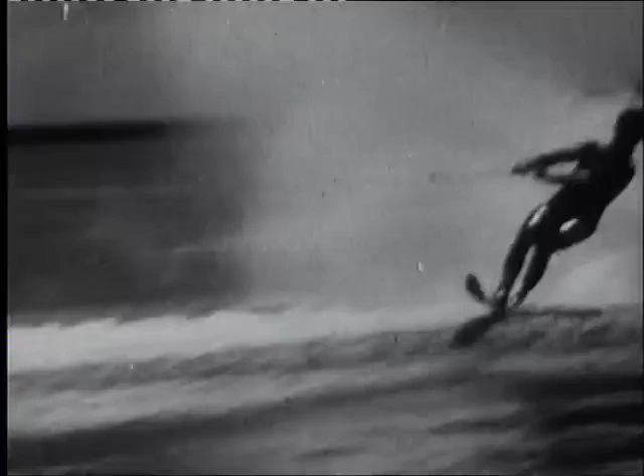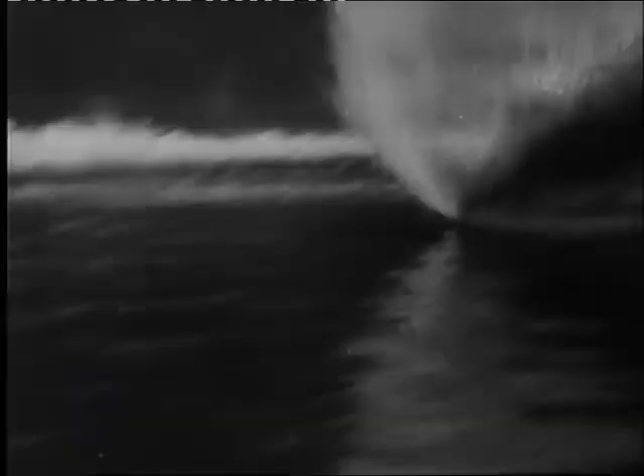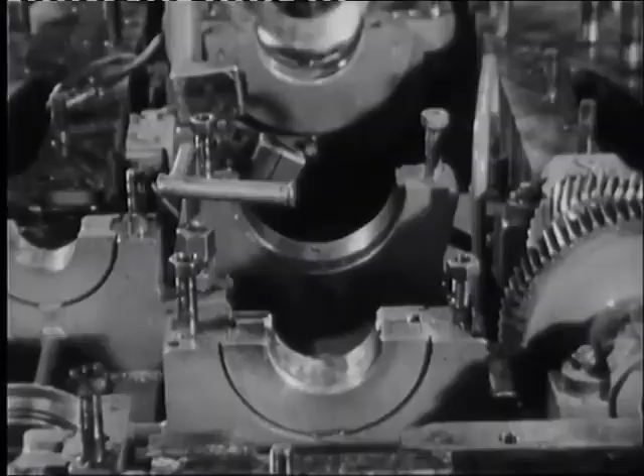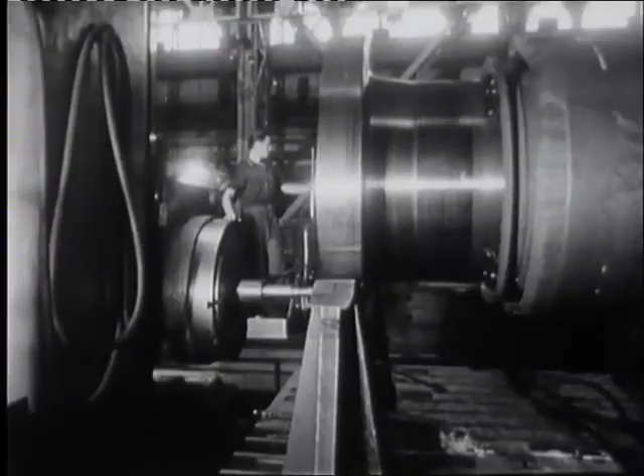In general, in a number of critical areas of technology, plain bearings have predominant application. They are versatile and provide reliable, durable operation of the support units of extra heavy shafts. High accuracy of precision machines.

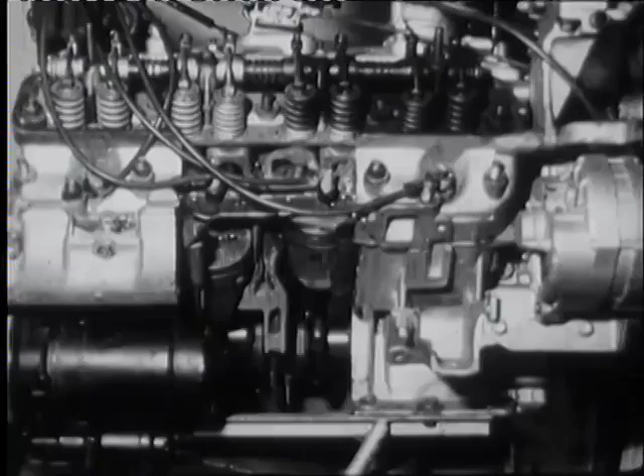The plain bearings operate reliably at high shaft speeds, and in adverse temperature conditions, as well as in a polluted and aggressive environment. They are insensitive to high shock and vibration loads. The performance of plain bearings is due to the simplicity of their design.

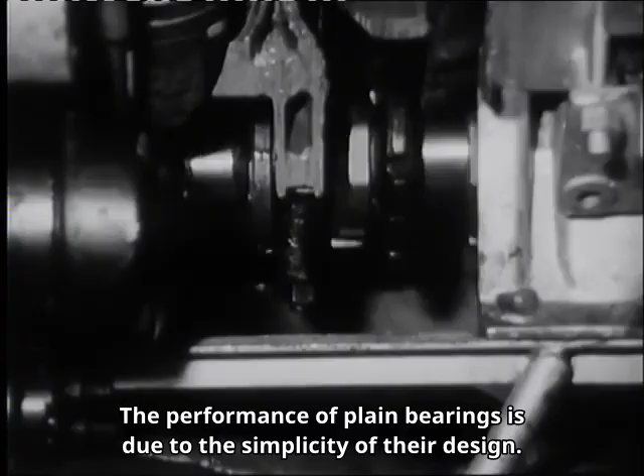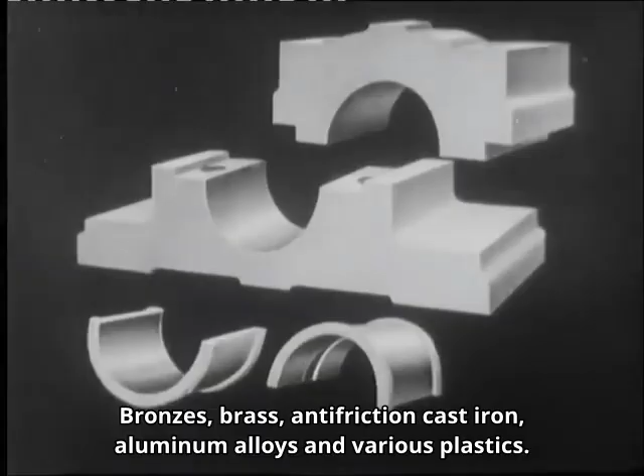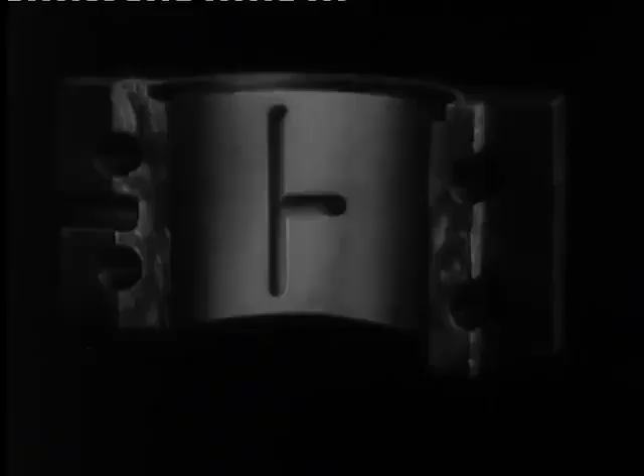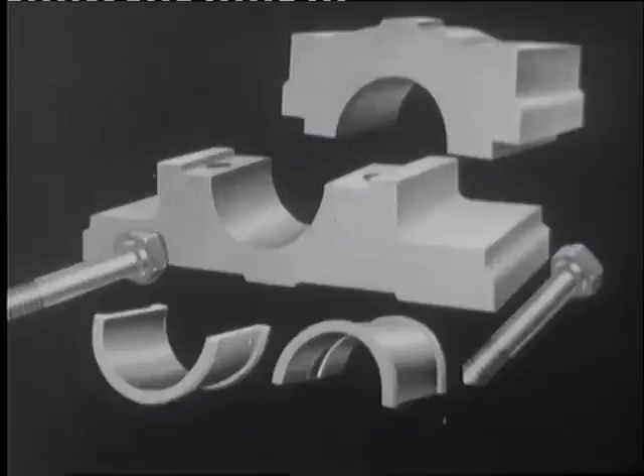Thus, the most common radial plain bearing in technology consists of a steel or cast iron housing and an insert made of anti-friction materials: bronzes, brass, anti-friction cast iron, aluminum alloys, and various plastics. The steel liners have an anti-friction coating made of babbitt. The liner has oil supply holes and lubrication grooves. The sliding bearings are usually detachable, which simplifies the installation of the supporting units of the machines.

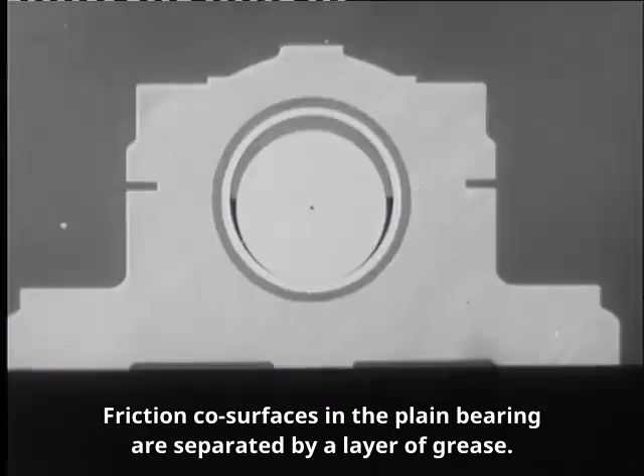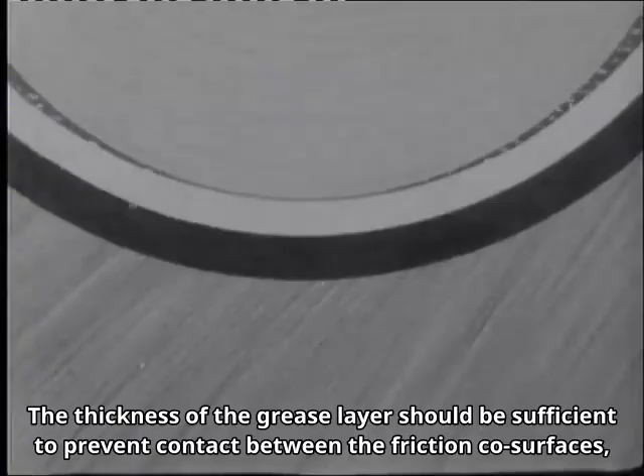Friction co-surfaces in the plain bearing are separated by a layer of grease. The thickness of the grease layer should be sufficient to prevent contact between the friction co-surfaces, which lead to their wear and large losses to overcome friction. In bearings, it is necessary to provide a mode of pure liquid friction, in which there is no contact between the rubbing co-surfaces and friction occurs only between the layers of lubricant separating them.

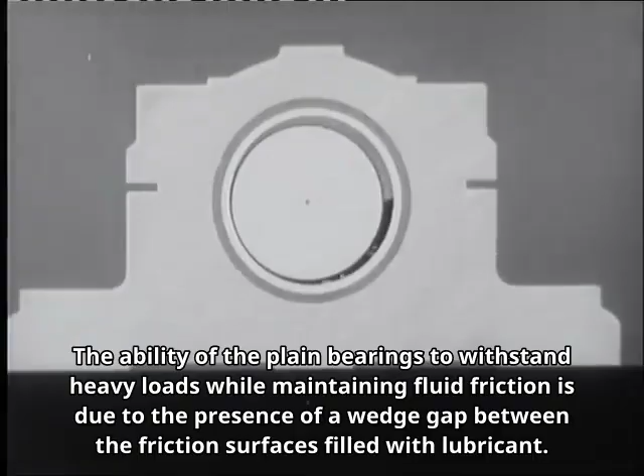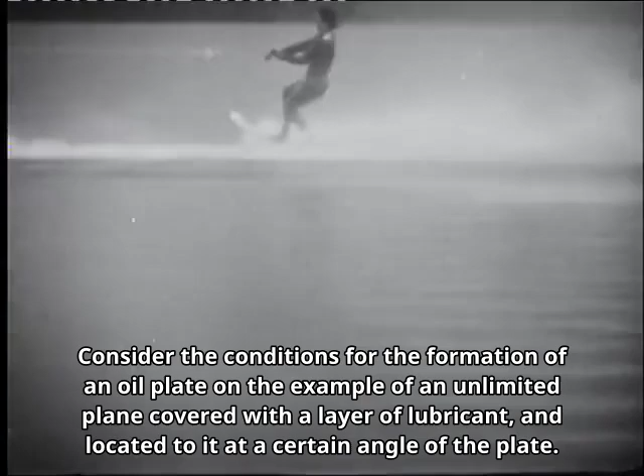The ability of the plain bearings to withstand heavy loads while maintaining fluid friction is due to the presence of a wedge gap between the friction surfaces filled with lubricant. Consider the conditions for the formation of an oil wedge on the example of an unlimited plane covered with a layer of lubricant and a plate located at a certain angle to it.

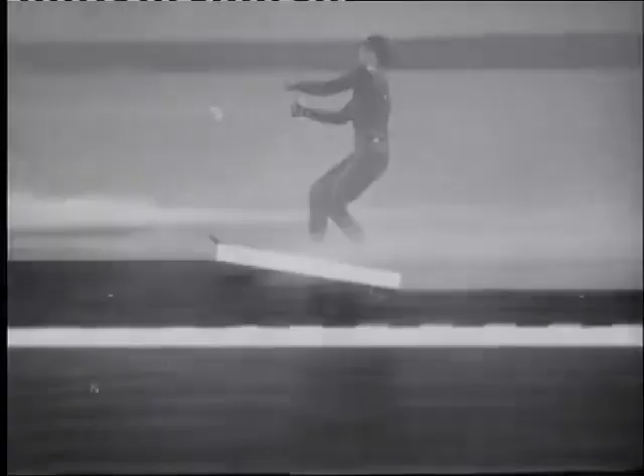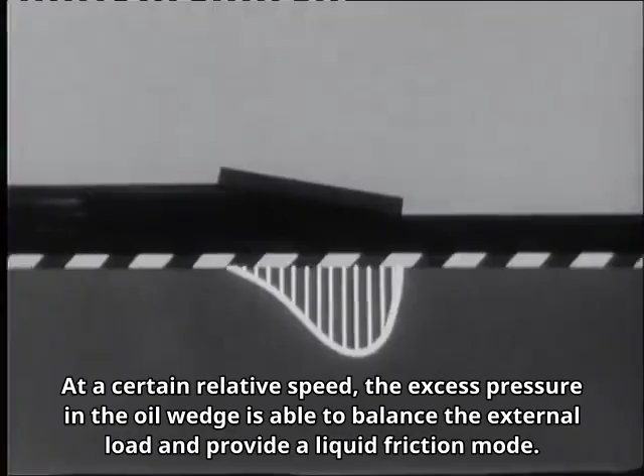With their relative movement, the viscous lubricant, due to internal friction, is carried away into a wedge-shaped gap. The wedge-shaped gap creates resistance to the movement of the viscous lubricant, and, in accordance with the law of continuity of the flow of practically non-compressible liquid, excess pressure arises in the formed oil wedge. At a certain relative speed, the excess pressure in the oil wedge is able to balance the external load and provide a liquid friction mode.

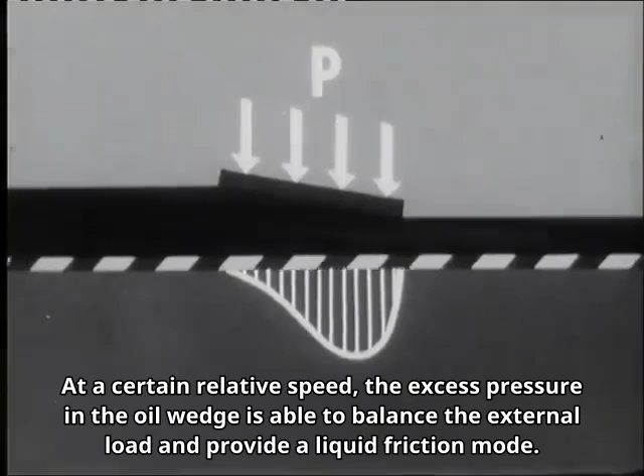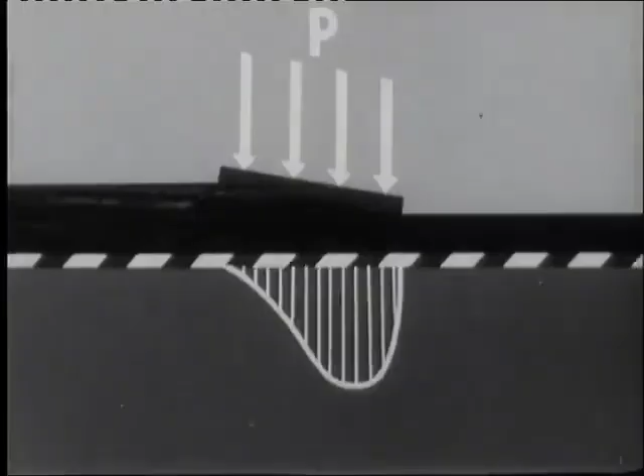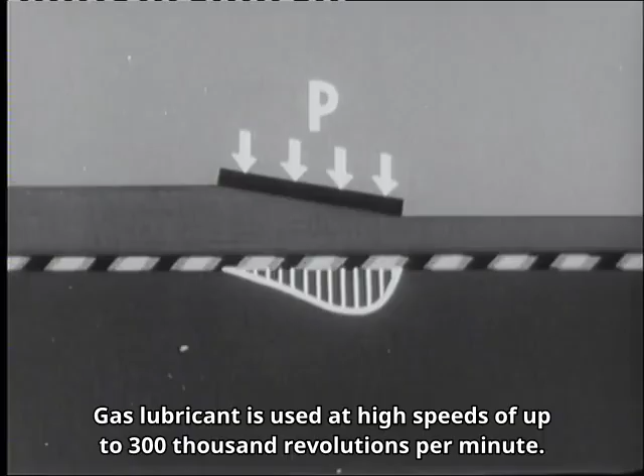The greater the relative velocity of the friction surfaces, the greater the magnitude of the overpressure and the bearing capacity of the oil wedge. At high relative speeds, water and kerosene are used instead of oil. Gas lubricant is used at high speeds of up to 300,000 revolutions per minute. Sliding bearings that use the effect of an oil wedge are called hydrodynamic.

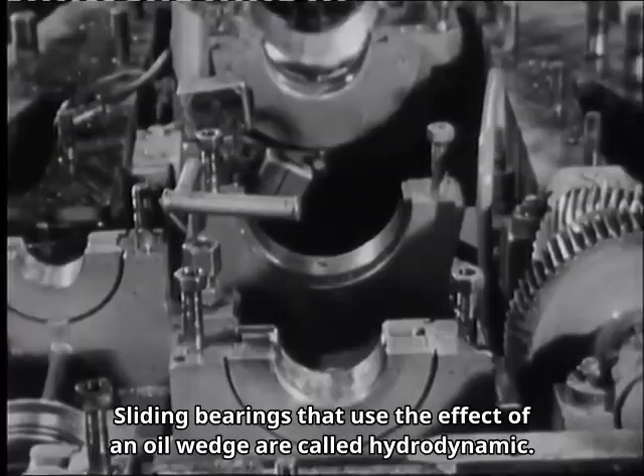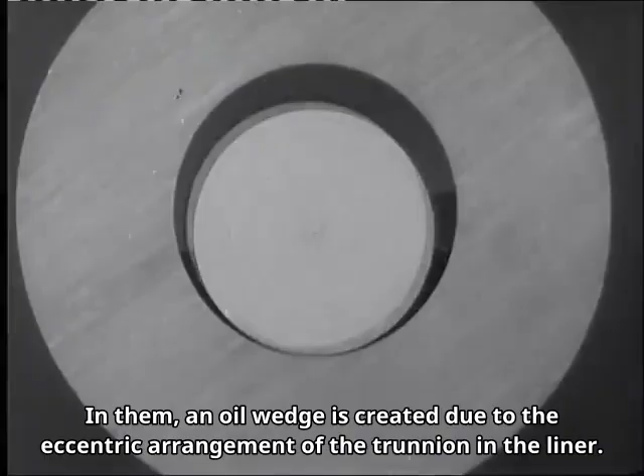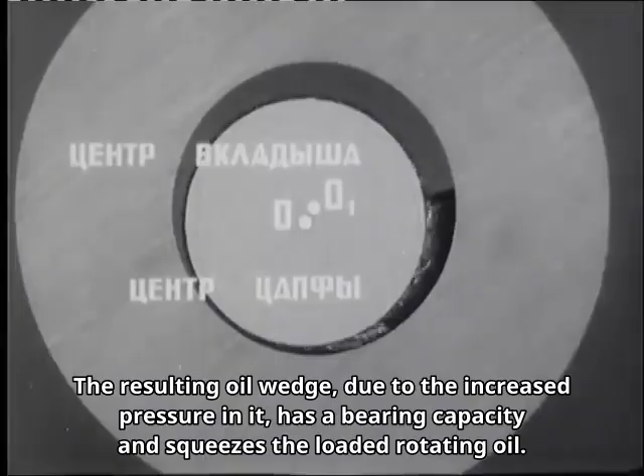Radial plain bearings are the most widely used in technology. In them, an oil wedge is created due to the eccentric arrangement of the trunnion in the liner. The resulting oil wedge, due to the increased pressure in it, has a bearing capacity and squeezes the loaded rotating trunnion upwards and somewhat in the direction of its rotation.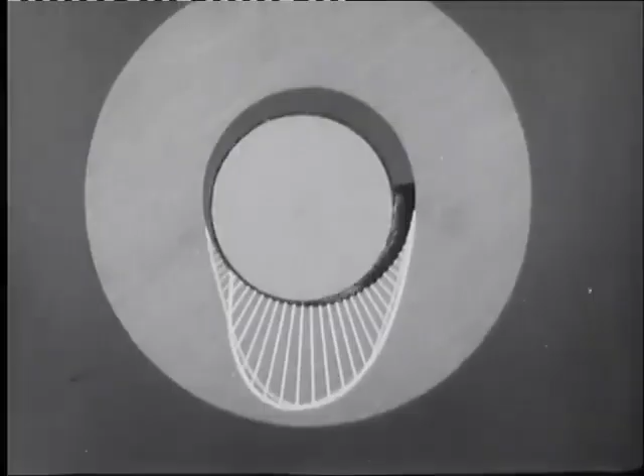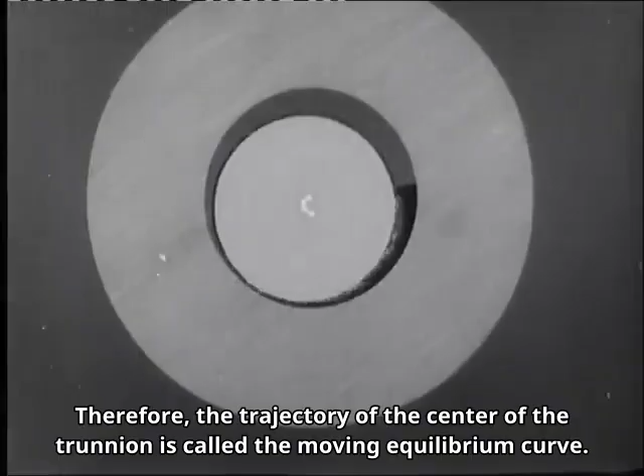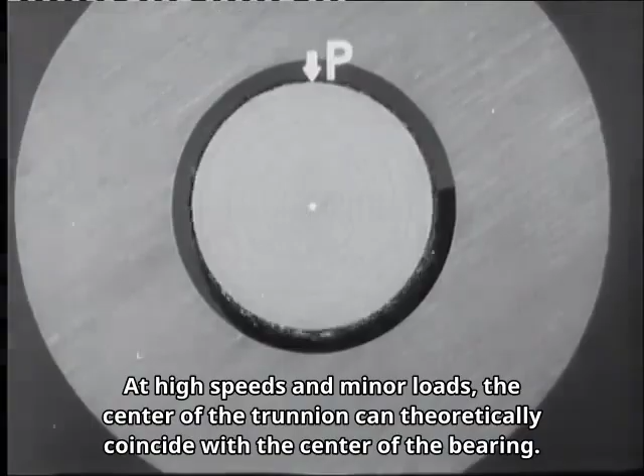The movement of the center of the trunnion continues until the resultant forces of pressure and the forces of internal friction balance the external load. Therefore, the trajectory of the center of the trunnion is called the moving equilibrium curve. At high speeds and minor loads, the center of the trunnion can theoretically coincide with the center of the bearing. In such bearings, undamped oscillations of the shaft can occur with a frequency approximately equal to half of the angular speed of its rotation.

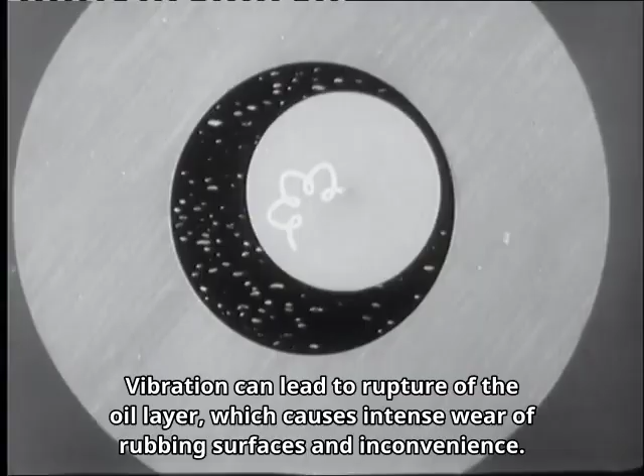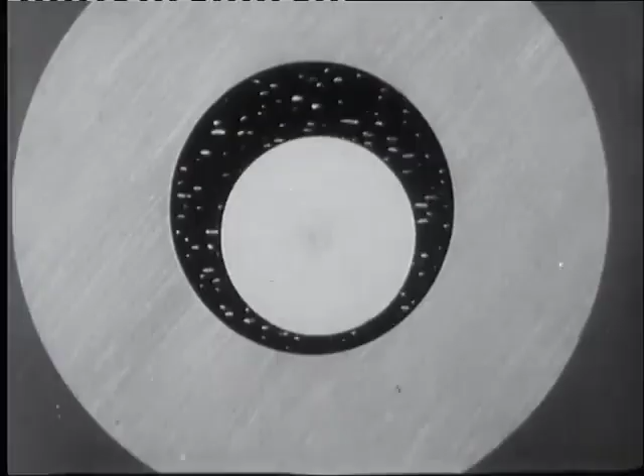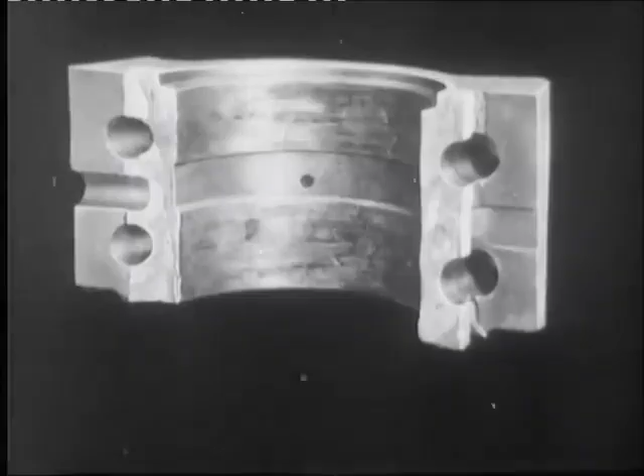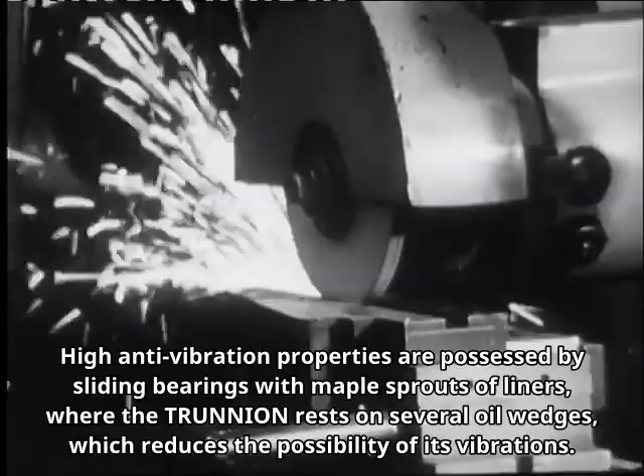Vibration can lead to rupture of the oil layer, which causes intense wear of rubbing surfaces and bearing failure. To reduce the possibility of vibrations in the bearings of high-speed machines, the area of the working surface of the liner is reduced to increase the specific load. High anti-vibration properties are possessed by sliding bearings with multi-segment liners, where the trunnion rests on several oil wedges, which reduces the possibility of its vibrations.

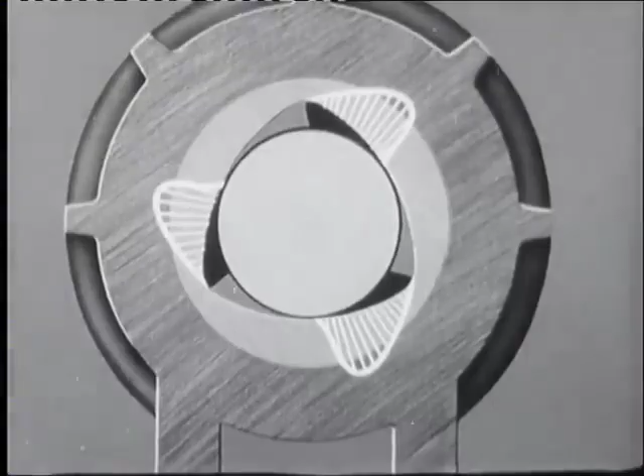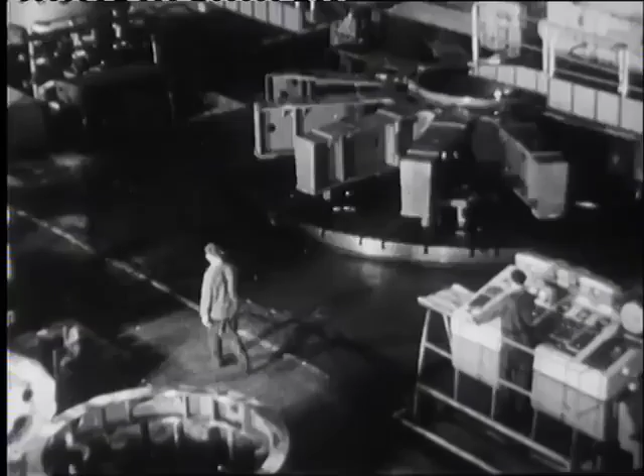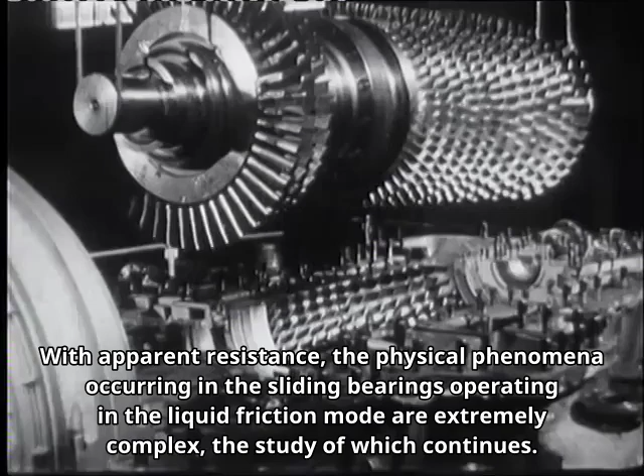Hydrodynamic plain bearings have an important property: to damp the impact loads on the shaft, which increases the reliability and durability of the machines. The basics of hydrodynamic theory were developed by outstanding scientists Petrov, Reynolds, Zhukovsky, Chaplygin. With apparent simplicity, the physical phenomena occurring in the sliding bearings operating in the liquid friction mode are extremely complex, the study of which continues.